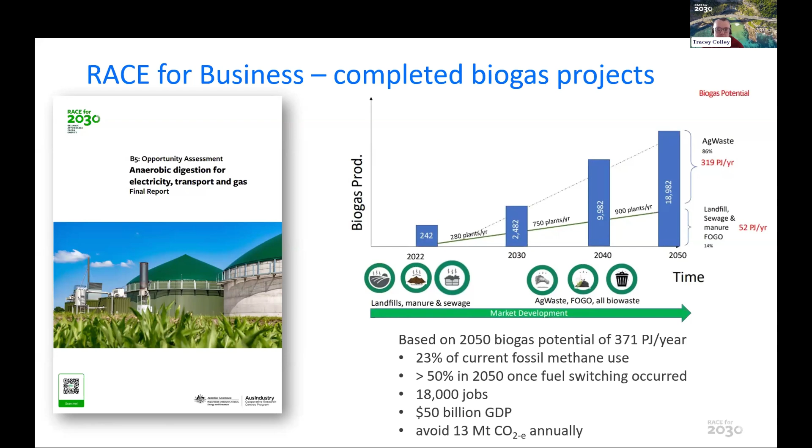So the opportunity assessment identified a range of different projects. Some of them are highlighted there in terms of their potential benefit to the economy in terms of millions of dollars per year. We've identified some short-term priorities for the industry in terms of helping to make the economics of projects stronger. But a lot of these projects need, as always, support from industry in terms of cash contributions for us to be able to match with federal government funds.

So the main front runners are digestate assessment and standardization. Victoria's ahead on that one, but it'd be great if we took a cooperative, coordinated approach across the country that was risk-based, looking at what's happened overseas.

Biomethane quality specifications, looking at using everything that comes out of a biomethane plant, so using bio-CO2, not just the biomethane, but also looking at how we value biomethane. So to date, in terms of an inclusive renewable energy market, we do have the green gas scheme, but unfortunately most of the current regulatory regimes, guarantee of origin, various renewable fuel schemes, have focused mostly on hydrogen, not on biomethane. So lots of work still to do.

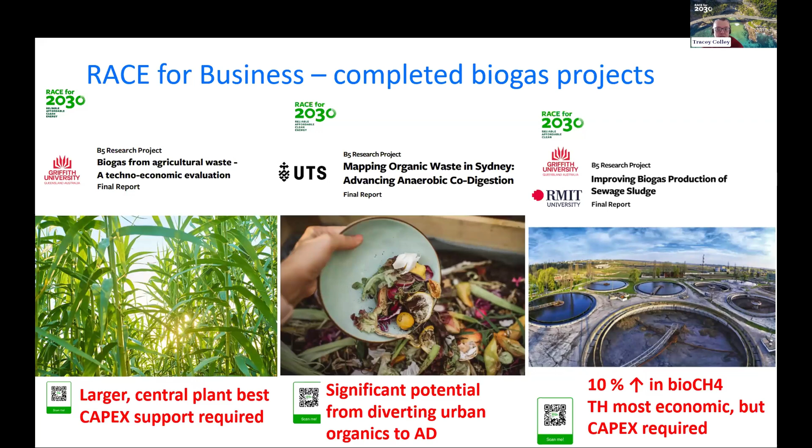We also have a current project underway, Energy Flexibility for Water Corporations, which is being run out of RMIT. It's really about optimizing energy cost and greenhouse outcomes for a site by coordinating what happens with electricity consumption, flexible demand, on-site EV charging, on-site solar PV, linking to surrounding residential PV, and potentially also community batteries. And it has a linked PhD project that's about maximising renewable energy for water corporations.

Next, there are also one PhD underway with UTS that is about optimal planning for biogas in wastewater treatment plants, and one that is still Prasad and team are working on identifying a student for sugar mills.

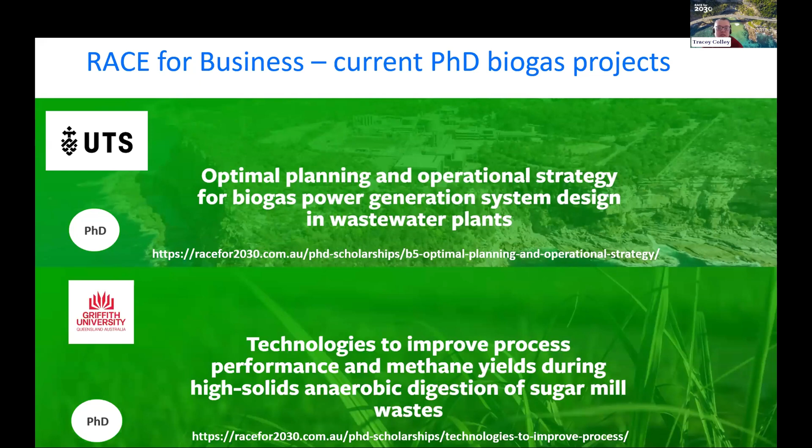Yep, we also have PhD projects as part of RACE, which are, if you're not in a hurry, they take 3 years — a very cost-effective way of getting some top-notch research for your organisation.

We also have one upcoming project from QUT, which is looking at addressing ammonia inhibition in anaerobic digestion. It's a proof of concept project, has been done overseas, but not yet in Australia. So we're looking at doing that.

But basically, I mean, those are the current and completed projects, but in terms of any sort of projects we can support moving forward — to date we've done a lot of techno-economic type analyses, but we can look at basically any issue which is slowing down decarbonisation at scale or at pace.

So that could be customer preferences and business models, market pricing and regulatory design, knowledge sharing and market transformation, which can be about consumer acceptance, knowledge sharing with a range of different people in organizations who need to make decisions about biomethane projects, but also system planning capabilities and operations.

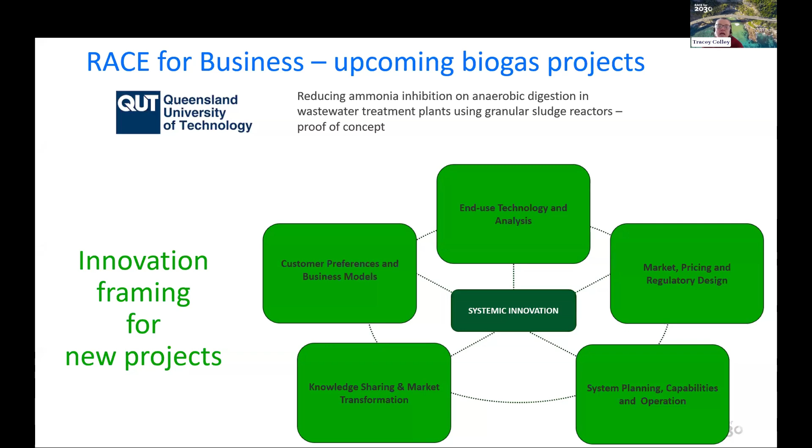So training requirements, basically anything that's going to help support the industry, we can look at supporting from a research perspective. So how do we work? We can basically provide nearly half of the research costs of a project between us and our research partners.

We're looking at how, for existing feedstocks, we can increase the biogas production from that feedstock by looking at things like anaerobic co-digestion, removing inhibition. We also can look at how to incorporate flexible electricity demand into the project overall.

Participating in FCAS markets is about reducing cost, but also reducing greenhouse emissions. We're also looking at taking a whole-of-site approach, integrating PV, building-integrated PV. Once again, the required outcome is reducing costs and greenhouse emissions.

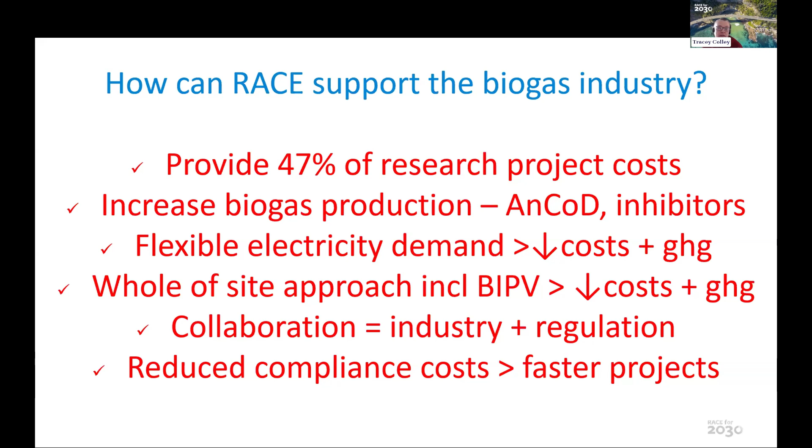What we'd ideally like to see in the project is a collaborative approach, with industry representatives but also representatives from government who are involved in regulation and incentives for the project as well. What we hope the net result will be is that for industry, we can help reduce the compliance costs of the project.

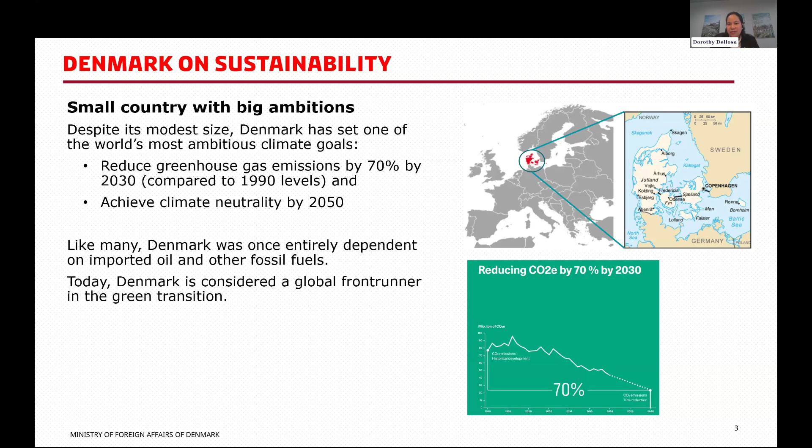So again, it's a transition into that green journey from black to green, where it all started back in 1973. 1973 was an oil crisis, and that really struck a nerve and made Denmark realize they don't want to be an oil-dependent country. 90% of their energy was based on imported oil. So that came about, that inspiration and aspiration to really turn that energy dependency into a green transition.

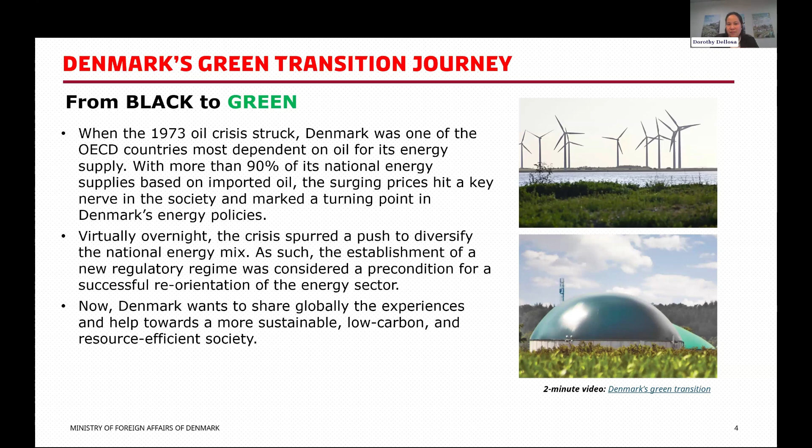And now we are sharing with you these key learnings on making a sustainable, low carbon, and resource efficient society. Just a recap or overview of biogas production: currently there are 150 biogas plants in Denmark. Mostly 75% are livestock waste and 25% are from different organic waste like household, straw, and energy crops. It also used to be only electricity production, but right now 80% is upgraded and fed into the natural gas grid.

That is really something that's why Jared, Tracey and I really wanted to bring this session into play - what can we learn about, and how can we adopt some of these key learnings? In 2023, almost 40% of biomethane was in the Danish gas system, and they're also very ambitious toward the goal by 2030: they want 100% green gas consumption.

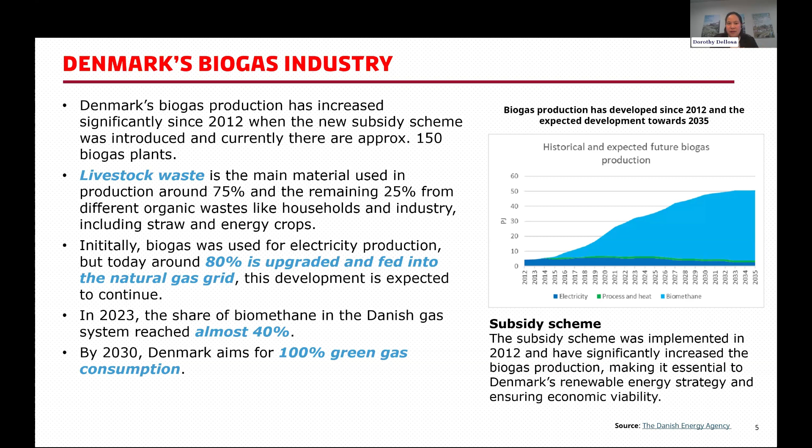On your right is a graph showing when the subsidy scheme came in, there's a portion of usage of electricity, process heat, and biomethane. Ramboll will talk more about this. The main inspiration is they're also improving their process as we go along, currently trying to improve methane loss from biogas plants, making sure they use sustainable materials like straw, aiming for 100% green gas by 2030. They're also trying to phase out energy crops like corn, because it's a food competition and it promotes waste use, and instead utilizing more manure and organic waste.

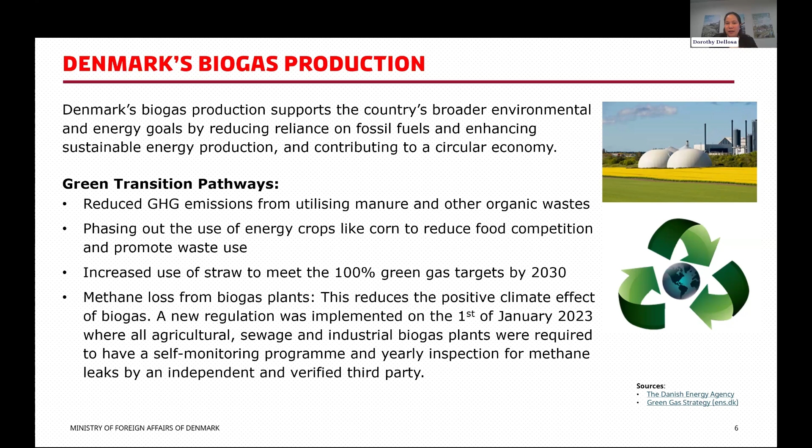The inspiration came about because there had been a lot of talks about biogas, and we saw the gap in opportunity to invite experts from Denmark. Who else is there but Ramboll, who has been in the business for more than 30 years, doing a lot of bioenergy and biogas projects, and currently on their path to turning 100% efficiency with bioenergy with 350 plus projects across the globe. So not to further delay the discussion, I will now introduce you to the Ramboll team.

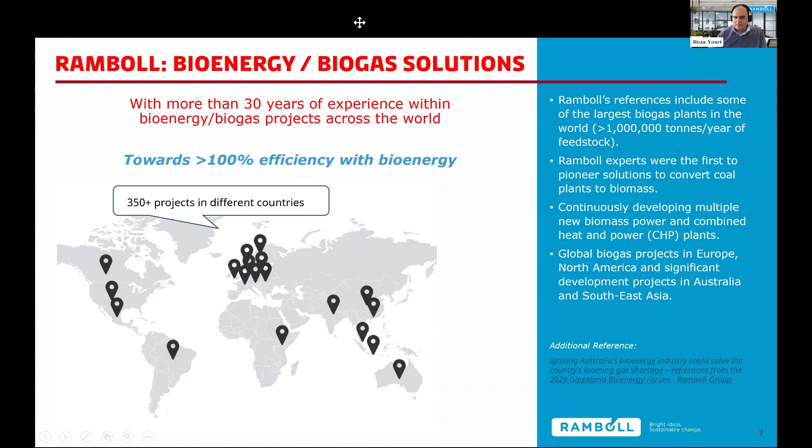Hello everyone, my name is Reza, I'm joining from Ramboll Australia. Today with me is Manuel Ortiz and Maria as well from the Denmark Copenhagen office. I'll start sharing my screen to go through the presentation and discuss. Hopefully everyone can see my screen now. The title of the presentation today is biogas development in Denmark.

What is the insight and opportunities that we can learn in Australia here? First, I want to start by acknowledging the country. Ramboll acknowledges the traditional owners of the land we are meeting on today. I'm from the Wurundjeri people, and the traditional owners throughout Australia where Ramboll carries out work and projects, and we pay our respects to their elders past and present.

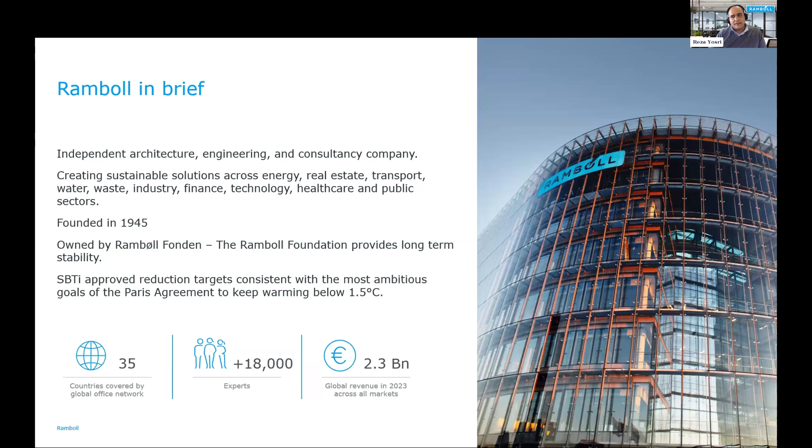Just a bit about Ramboll. Ramboll, as mentioned, is a Danish company. It started in 1945, and it has belonged to the Ramboll Foundation. We operate in 35 countries with more than 18,000 people, and our revenue for the last financial year was 2.3 billion. Importantly, we are an independent architecture, engineering, and consultancy company. We are consultants, and this is the main business we do across different countries in the world.

In Australia, we have 4 main offices: Perth, Melbourne, which I'm from, Sydney, and Newcastle. The business units we have in Australia are energy, environmental and health, architecture and landscape with the brand called Henning Larsen, and then water and transport.

The first thing we'll go through - probably some of you know what biogas is, but I'm trying to set the scene, what is biogas and why is it important. Biogas is generated through anaerobic digestion. In the absence of oxygen, the feedstock - which could be anything from agricultural waste to manure or the organic portion of municipal solid waste - is fed into the anaerobic digestion system. With the absence of oxygen, the bacteria decompose the organic materials and create biogas, which is mainly methane and CO2.

Methane is what we have equivalent in natural gas. More than 60% of biogas is usually methane, and the rest is CO2 and other impurities.

One important thing is we can use upgrading technologies that are out there on the biogas, and then we can either use it in electricity generation using cogeneration or CHP to create electricity and sell back to the grid, or we can upgrade it using different technologies to create two added value components - biomethane, which you can inject back into the grid, and carbon dioxide.

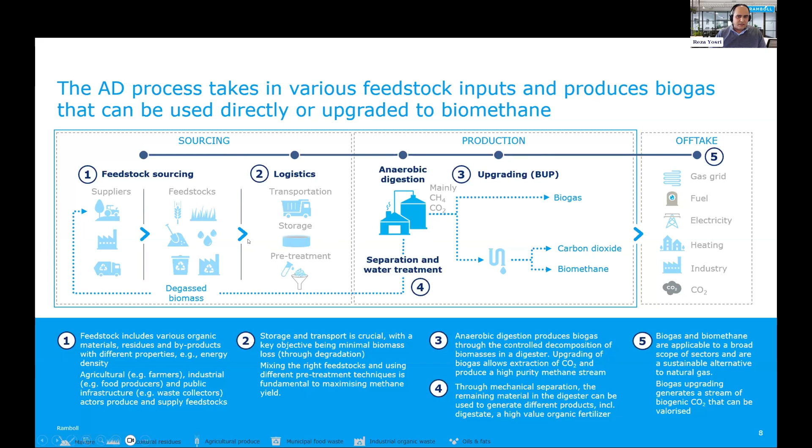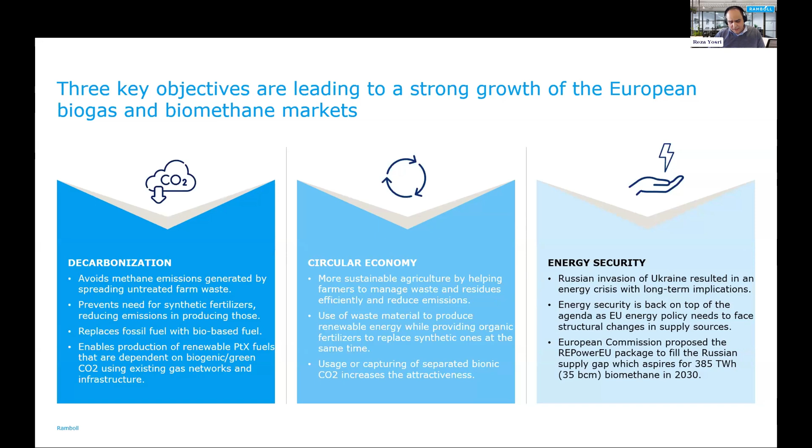So over to you, Maria, to discuss biogas development in Denmark.

Yes, thank you, Reza. In the next 4 slides, I want to provide an overview of the current status of the biogas sector in Denmark, and also show you how it's different from other European countries that also have a mature biogas sector.

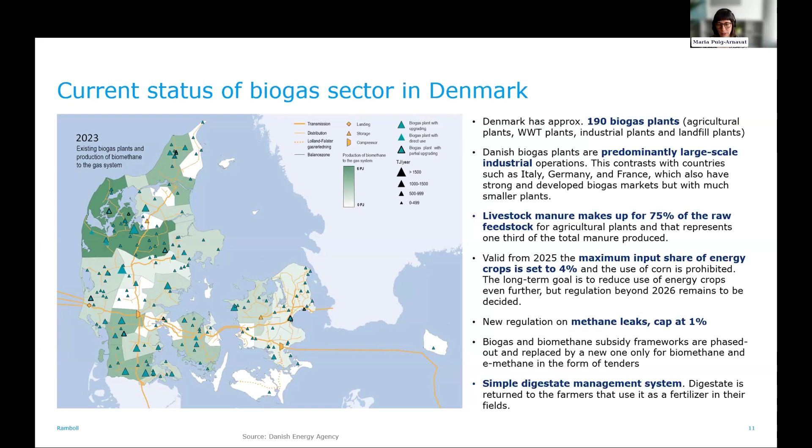What has also helped Denmark have this well-developed and mature biogas sector with huge plants is a simple digestate management system, where farmers deliver manure to the biogas plants and then take the digestate back to use as fertilizer in their fields. We've seen other countries like Italy, Spain, and the Netherlands where the digestate management system is much more complex, and it's difficult and expensive to get rid of the digestate.

If we look at biomethane's contribution to the Danish gas grid, it went from around 10% in January 2020 up to a peak of 39.7% in the second half of 2023. The governmental ambition was initially set to achieve 100% green gas by 2034 in the green gas strategy, but now this goal has been moved up to 2030.

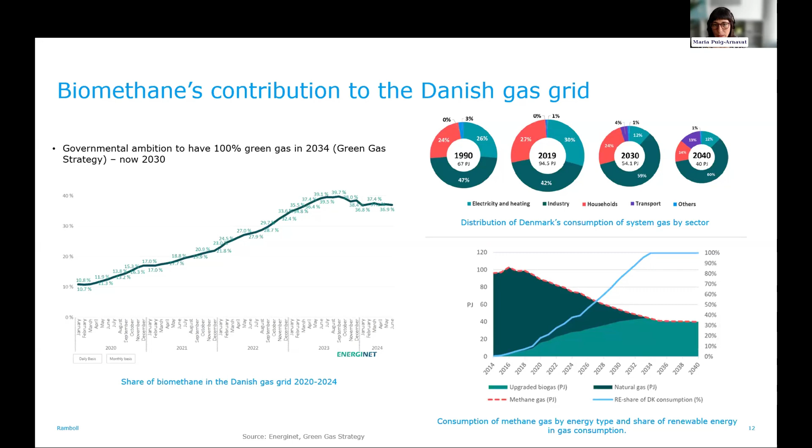Here I wanted to compare the Danish biogas sector to other European countries with some numbers. On the left, this figure shows the high share of biogas plants with upgrading technology - plants that separate CO2 from methane to produce biomethane, not just biogas. Biogas production has remained constant since 2013, but biomethane production has increased exponentially. Compared with other countries that still have a lot of biogas plants, here the focus is on biomethane production.

As mentioned before by Dorothy, there's a high share of biomethane plants connected to the gas grid. Most plants inject into the distribution grid, and very few into the transport grid, which poses a challenge to the grid operators, Energinet and Evida, to maintain system balance as the supply of biomethane in local distribution grids exceeds gas demand. This is especially important during summer when there's lower gas consumption.

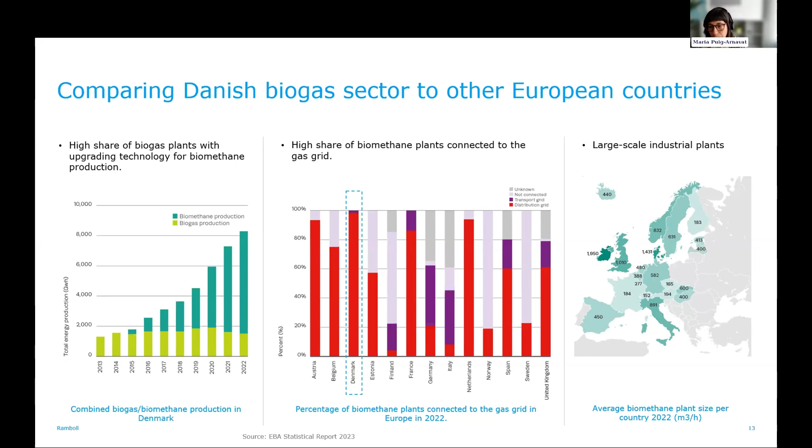So I'll jump back again to this. What we're trying to say here is how Denmark reached the point it has today. This is a history showing what has been done so far and how this could apply to Australia, how we can learn from this. Similar to what happened in Australia as well - from the early 1920s, when the covered lagoon was the case, wastewater treatment plants were producing biogas and generating electricity using CHPs, or cogeneration.

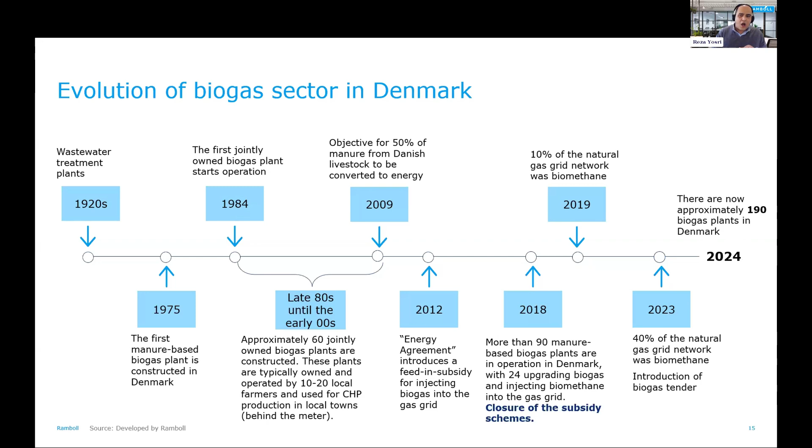So if we look at how Denmark reached this point, based on Energinet, they've done it in 5 steps. We want to know how we can reach that in these baby steps, to get to the 5th continental stage when everything is actually covered in the biogas market.

Steps 1 and 2 are most relevant for the Australian context: how we can subsidize biogas generation, as well as upgrading back to the grid and inclusion of biomethane in the national gas grid network. These are the important parts where we want to take action in Australia to get the industry working.

What is happening at the moment is Denmark is in step 4, which involves connected cross-border flows for biomethane and all the fantastic things mentioned by my colleague Maria. In Australia, we are almost finishing step 1, except there's no subsidy scheme as of yet. What we're going to need is more actions to get to step 2 as well, to keep the momentum going.

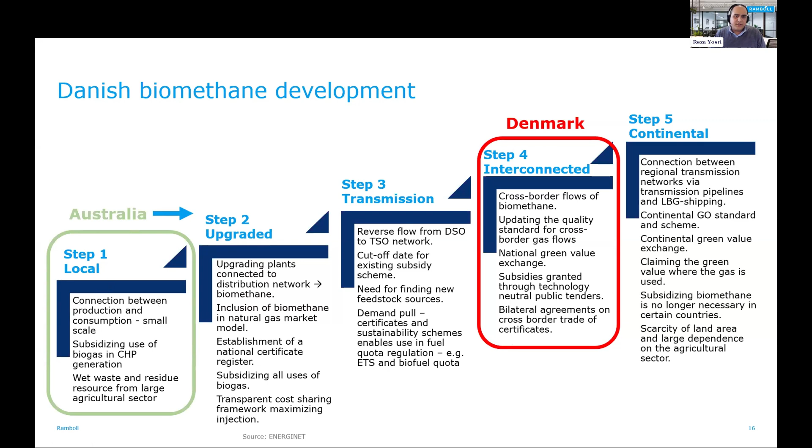To go into a bit more detail on how these early enablers helped Denmark, my colleague Manuel is going to take the lead again.

Yes, thank you, Reza. There are some key enablers for Danish early success, wrapped around 5 main topics that I'm going to discuss briefly.

First is infrastructure, as Maria said - a pipeline connecting and upgrading, enabling the upgrading plant into the distribution network. It's quite dense in Denmark and being developed, which is probably a difference with Australia. In addition, the infrastructure has revised standards to make it possible to inject biogas, since you have stringent requirements coming from the old fossil fuel era.

This makes it possible to integrate biogas at scale and at low cost. The second point is the market.

Of course, you need to create a set of conditions to be able to sell and buy biogas in the natural gas market model. One of the benefits in Denmark was also the opportunity to sell to other European countries. In addition, there was sharing of the added value of biogas with farmers, not always monetary, but also waste disposal for the farmers and getting the digestate back.

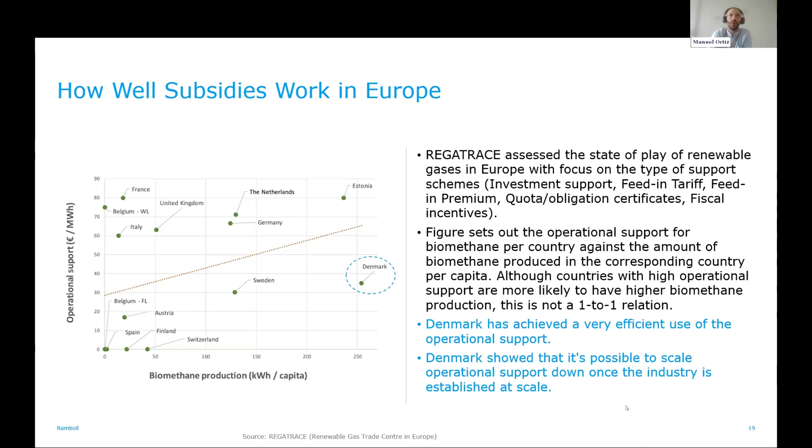Maybe we can go to the next slide. And to the following one. Here we have some examples that we wanted to showcase, and maybe we can also use them to answer some of the questions already.

This is one of the big players in Danish biogas, Nature Energy, who was acquired by Shell last year. They have 14 plants, treating 4.7 million tons of biomass. They have plants using biogenic CO2 that they bring to food grade quality and use in the food industry. There's also biomethanation, so when the biogas is split into biomethane, it's injected into the grid, and the CO2 is combined in another bioreactor with hydrogen to produce more methane.

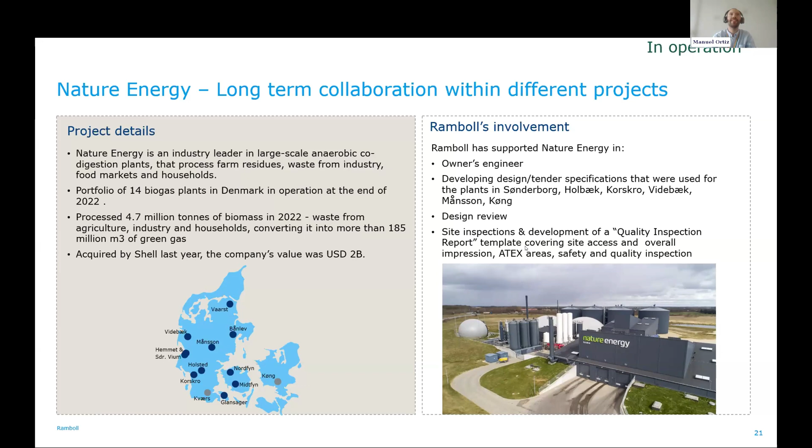Maybe the next one. In this plant, which is one of the largest in Europe, in Tønder, they treat 900,000 tons per year, producing 40 million normal cubic meters of methane, around 400 gigawatt hours per year. This plant also has CO2 utilization used for a power-to-X application, combined with hydrogen in another facility to produce methanol.

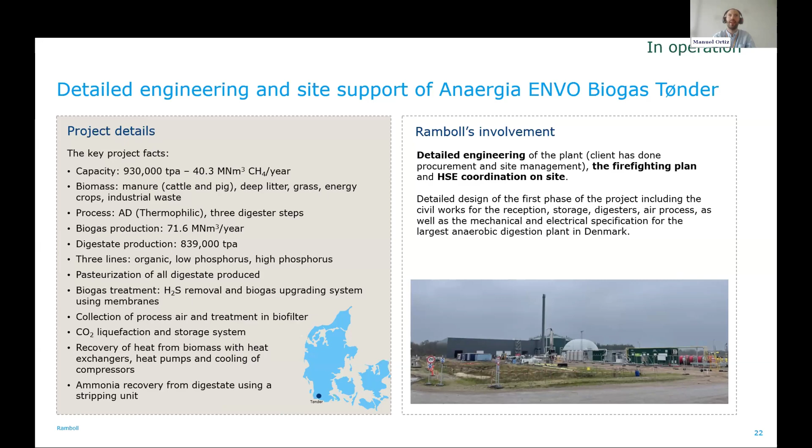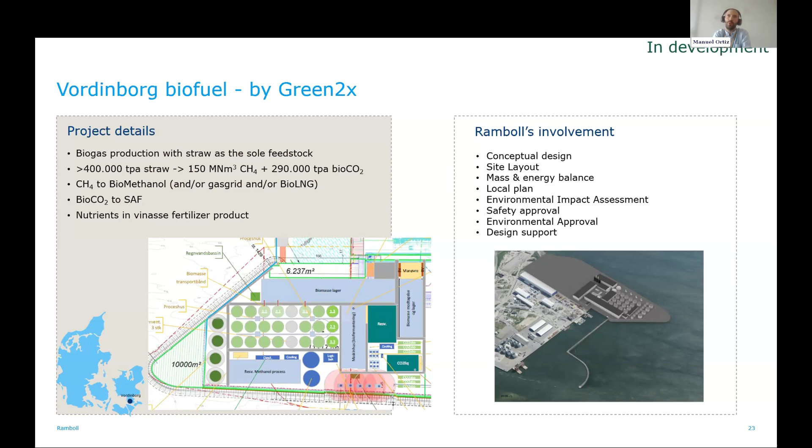I'll take the conclusion as well. What we are trying to do at Ramboll Australia, using our Danish experts like Manuel and Maria, is try to help Australia in this sector. The key conclusion is that incentives and mandates are key for developing bioenergy projects. Also, from what you've learned so far, Australia is well positioned to take advantage of the emergence of these bio-to-X technologies. Anaerobic digestion can definitely be scaled up and could be a source of green gas, green carbon, and biofertilizer—that's a very important thing to notice. Ramboll, as a Danish company, is here to bring insight from the Danish experience and the global experience that Ramboll has, and we are here to collaborate. That's all from our side.

I'll stop sharing. Well, thank you, Team Ramboll, and thank you for answering questions. I'm not sure if it was Manuel answering questions and presenting there at some stage. I'm not sure, but there's been plenty of answering our questions, and that's going well—absolutely keep going with that. Wow, that was excellent. It feels like, hey, we see that in Australia we've got the foundations here. We know biogas within municipal, but we are really 10 years behind, and we've got a lot of work to do.